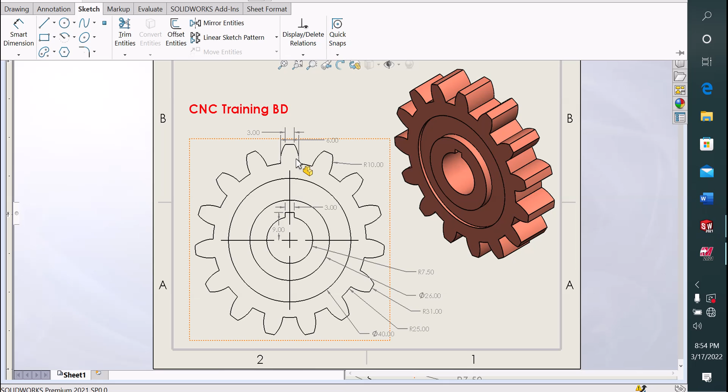See, and teeth, teeth with maximum width 6 mm and upper width 3 mm, and the radius 10 mm. So let's try to make this.

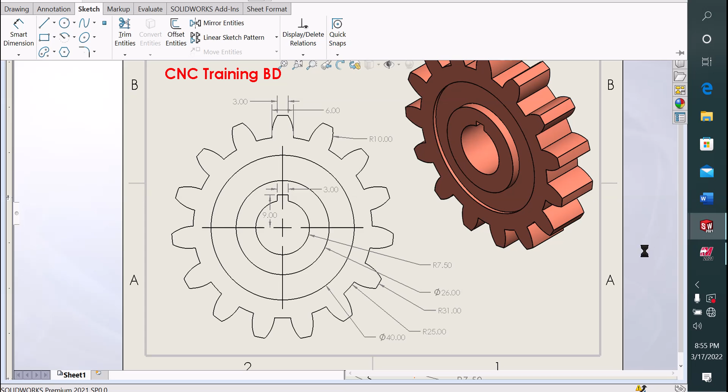First take the part, and then front plane, okay, and a sketch. Now I select circle.

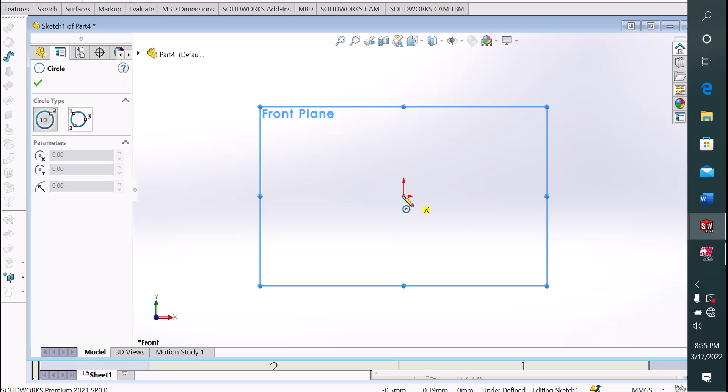I need fifth circle. 1, 2, 3, 4, and fifth. See, let's define first smart dimension, and here outer diameter.

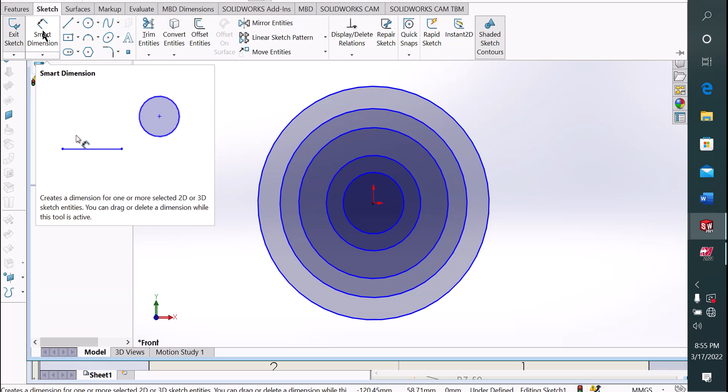The bigger diameter is 62 millimeter, and the second one 50 millimeter.

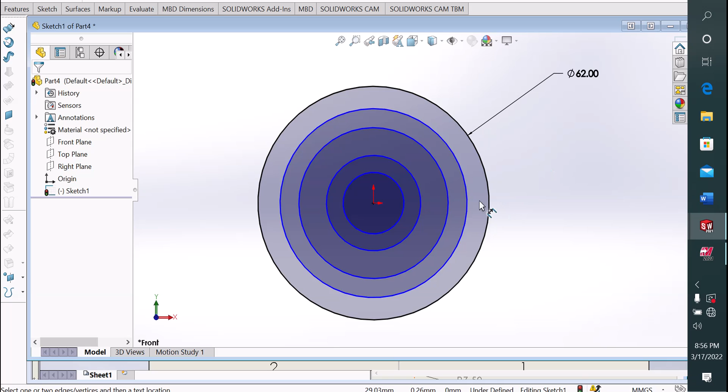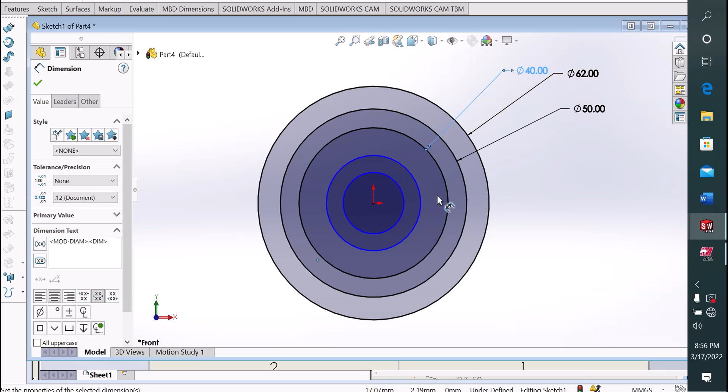And this 40 millimeter, and here 26 millimeter. And the last shaft diameter 15 millimeter.

Now click this outer diameter and make sure it's construction geometry. See, now it's construction. Now I choose line, first option, here center line, so start from origin. Okay, make sure it's vertical. See, it's vertical.

Now I choose 3-point arc. Click the arc and 3-point arc. Start from this here to here.

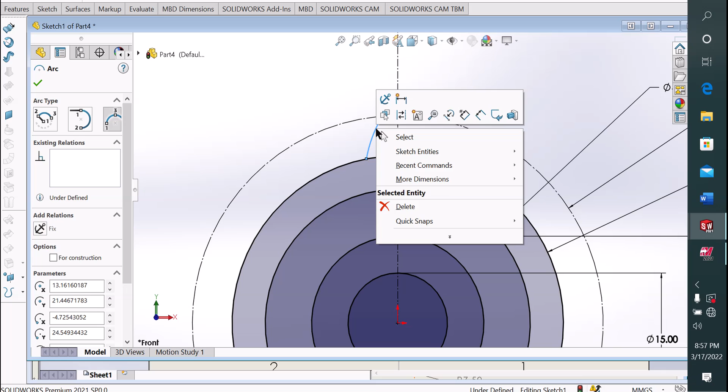Let's define, click smart dimension, and this point to center line here, bottom width 6 millimeter, one side is 3 millimeters.

And the top with one side 1.5 millimeter. And radius here, 10 millimeter.

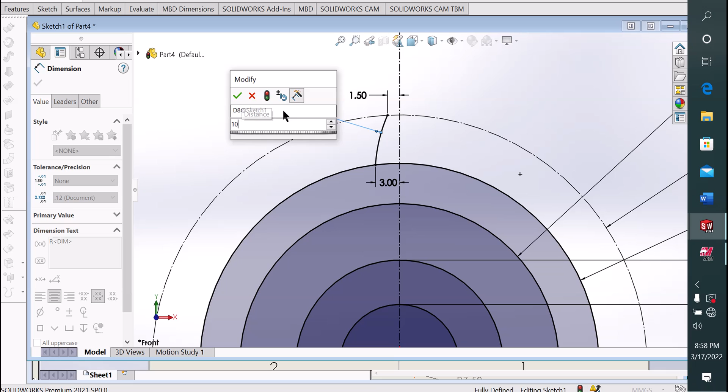Now I choose mirror. First click mirror option, and here choose mirror, and mirror about, press mirror from center line, so it's mirror.

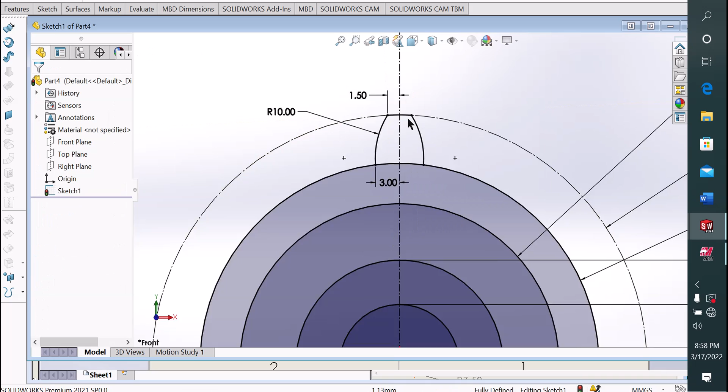Now I choose the arc, 3-point arc again, and start from first circle to here and connect this circle. See, it's connected from center diameter. So now our one teeth is created.

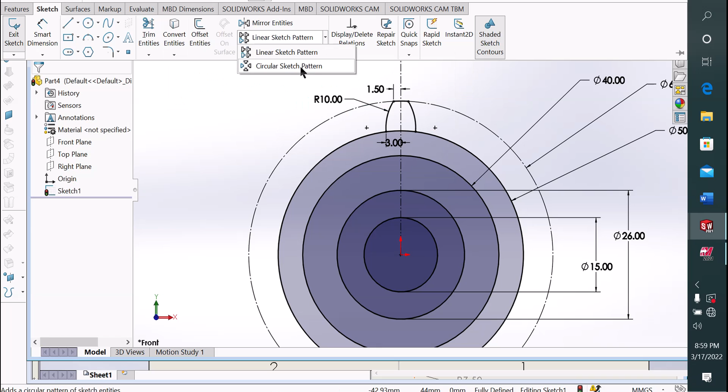Let's make a pattern. First, pattern option, here circular sketch pattern. First click this, and click the all teeth.

First, second and third, and here is teeth, number of teeth 16. Here is 16 of the teeth in circle.

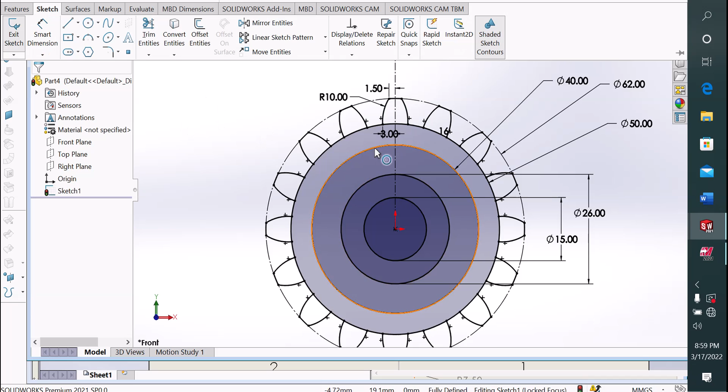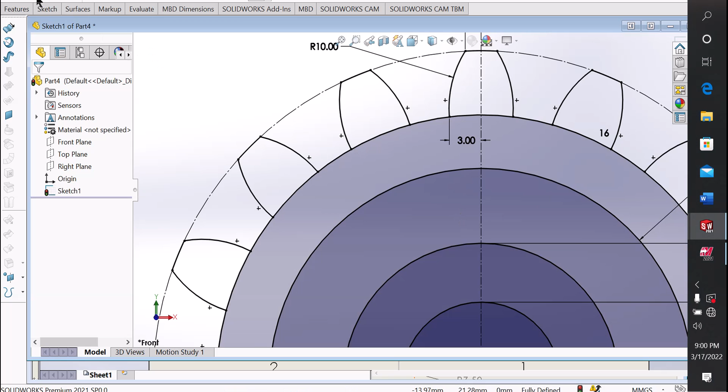Now I cut this unnecessary line. First, choose trim, power trim, and drag this, and all our entities trim in teeth.

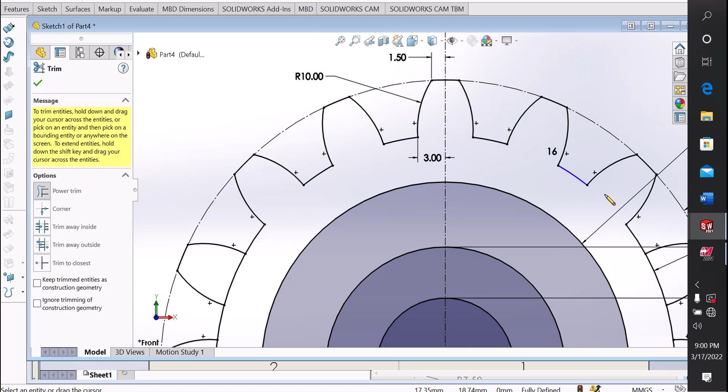See, our teeth is created. Now let's create the key slot.

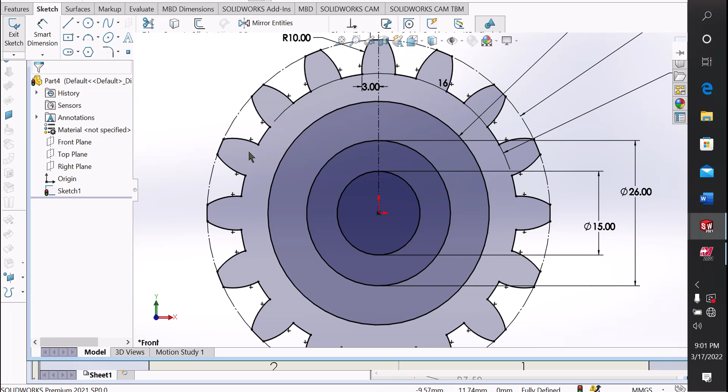First, I choose the center rectangle. Click center rectangle, start from this. Let's define, so smart dimension, slot width 3 mm.

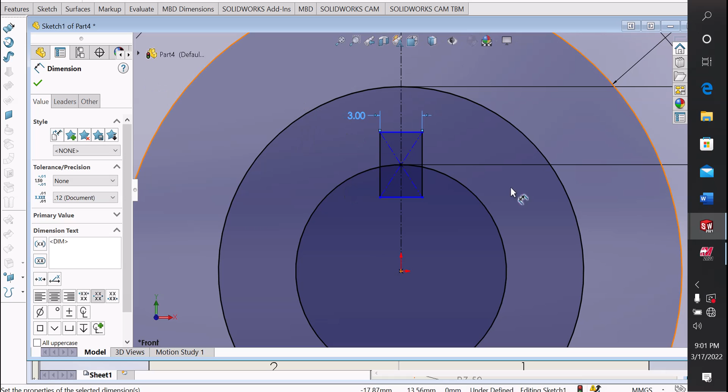And distance from origin here is 9 mm.

Now trim this portion, unnecessary portion. First, click sketch, here is trim entities. First, choose power trim and drag this inner rectangle.

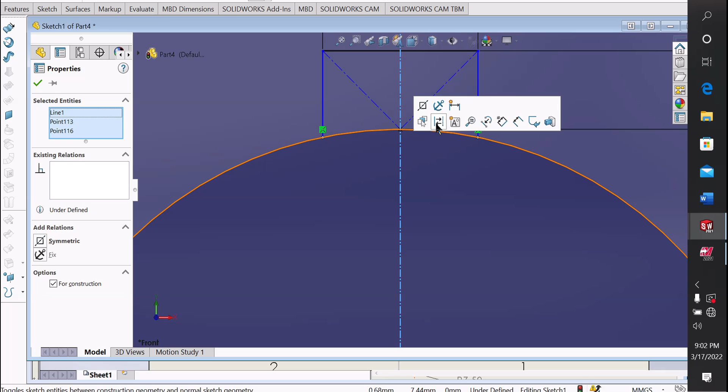After I cut this inner portion, our design is under defined. So first, click this point and hold Ctrl key to this and center line. Make sure it's symmetric. See, now our define is okay. Our design is fully defined.

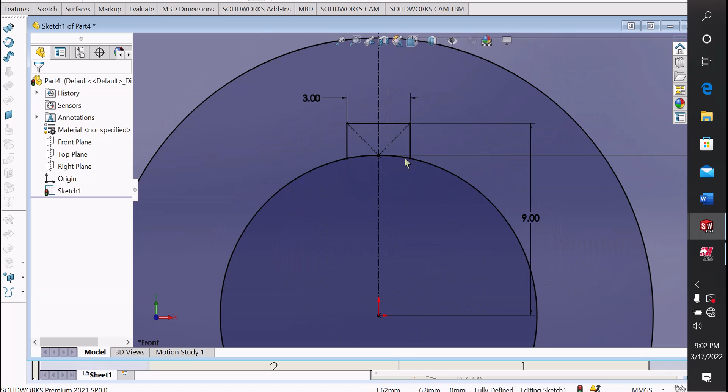If you want to 3D, first click feature, here is the 3D option, extrude boss. So I just learn step by step. Today I just show.

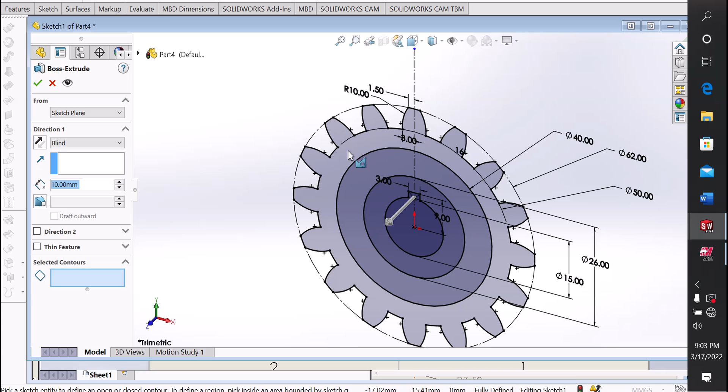First click here, here is with 10 mm. Okay, no problem.

See, and now again click this extrude, first option. I just say I don't learn this because I want step by step.

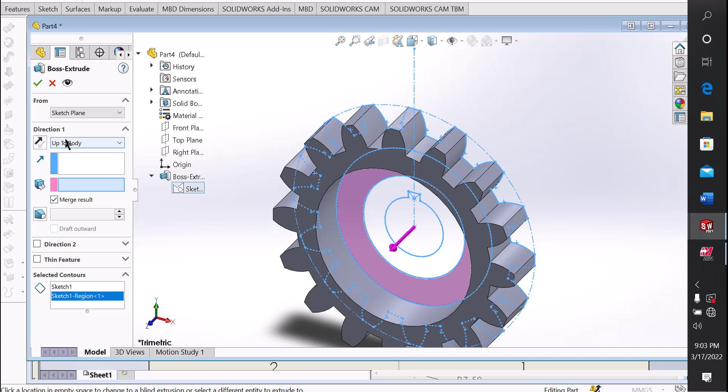Here is with 12 mm and it's mid plane. First one, and the last. Don't hesitate because I'm just showing fast.

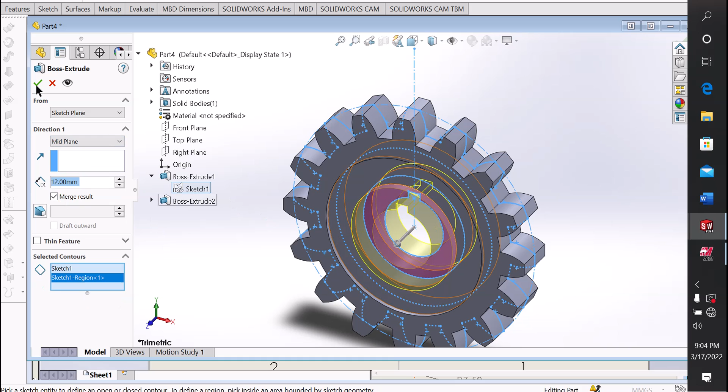You make 2D clearly. See, here is the 3D design. So no need to go fast, because when you reach your creative level, then I will show how to make 3D.